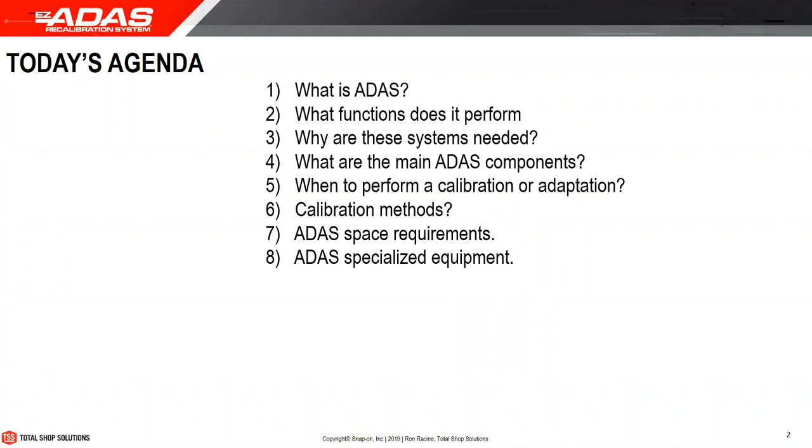So what we're going to cover is: what is ADAS, what function does it perform, why are these systems needed, what are the main ADAS components, when to perform a calibration or adaptation, calibration methods, which vary based on the origin of the vehicle—whether it's a German, European, Asian, or domestic vehicle—ADAS space requirements, ADAS specialized equipment, ADAS procedures, pre and post scan, ADAS centerline reference, ADAS pull drift and road ground compensation on the electromechanical power steering, and then we'll go to a conclusion.

So the industry is changing rapidly. Lately we've seen Ford and Amazon invest about $1.3 billion in a startup company called Rivian. They make an electric pickup truck and an electric SUV that resembles a Ford Bronco. The reason you see this association is Ford has the mass production capability and Rivian does not, but they have the technology on electric vehicles that Ford doesn't necessarily have. If you look at a Ford Fusion, the electric Ford Fusion actually uses a Toyota running gear. So you're going to see more and more of these partnerships occurring, but the industry is changing so rapidly.

In the past, we had time to train the technicians. Now it's like a daily thing—you've got to really stay up to speed.

So the SAE has defined 6 different categories for autonomous driving vehicles, in order to get to the autonomous driving vehicle, which is the ultimate goal for all car manufacturers. Right now, level 0 is no automation—those are vehicles where you have to drive the vehicle, accelerate and brake, total control.

Level 1 is driver assistance, so the driver must do all of the driving, but in some situations you'll get some basic help. This vehicle can provide basic help such as automatic emergency braking, lane support, lane keeping, or lane centering, and things like that. Level 2 is partial automation.

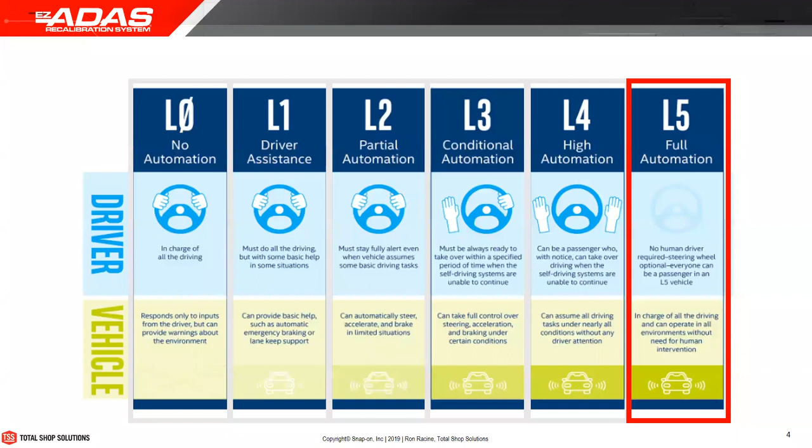So if you set the cruise control for, let's say, 70 miles an hour, and you catch up to a vehicle and he's only doing 60, well, obviously your vehicle is going to slow down to maintain a certain distance and speed of that vehicle ahead of you. If you want to pass the vehicle, all you do is hit the turn signal, and the vehicle will execute the pass, move into the lane, pass the vehicle, come back into the original lane, and reestablish the speed you already preset at 70 miles an hour.

So those vehicles exist. In the heavy duty truck industry, you'll find a lot of autonomous driving vehicles. Actually, you'll find more there than you will in the passenger car at this moment. And also other industries like mining, farming, and shipping or big ships on the ocean. They're all GPS guided and nobody actually really drives them, but you have to monitor the position.

So those systems exist, and if you've ever flown in an airplane, that pilot doesn't drive that airplane. That plane just flies itself from point A to point B. It just knows how to do that with all the computers and all the power behind it. The pilot's there to make sure everything is working correctly. There are no challenges, and if there is a challenge, then you should be able to take over and hopefully land the plane.

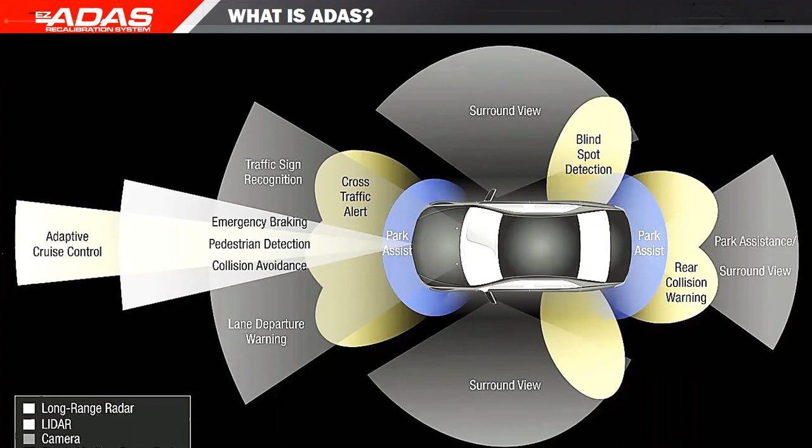Don't have to turn my head - forward and rear collision warning systems. That's to reduce the amount of accidents that could have been avoided, because you're at a traffic light and the car ahead of you, the light turns green, the car stops, and you're not paying attention and you rear end that vehicle. So this will help to prevent that.

Intelligent parking assistance, IPA, allows you to park either parallel or back the vehicle in between two vehicles automatically without using the steering wheel. The car will do it itself.

Cross traffic alert - these are systems that will inform you that there is traffic incoming on the side where you're probably not seeing it, it's out of your peripheral vision, and then it can take action, inform the vehicle, precondition the vehicle, and help you and the vehicle avoid a catastrophic collision.

And lane change assist, which is more for the autonomous driving vehicles, or like the Tesla, where you do get lane change assist. Or you may have lane keeping, which keeps you in the lane centering, which centers the vehicle in the lane, and then lane departure warning, which simply informs you that you're leaving the lane and that you should steer back into that lane.

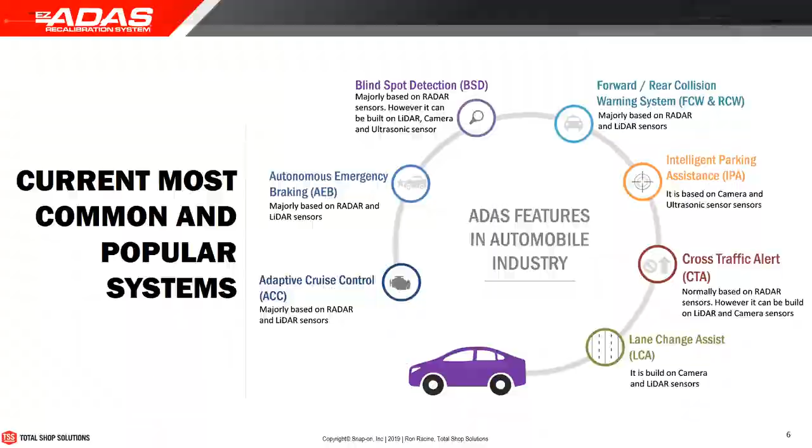By September 2022, 20 automakers have committed to make AEB, automatic emergency braking, a standard feature in their vehicles. So in model year 2022, 99% of the US market will have autonomous braking built into the vehicle, which is significant because that means all those vehicles will have at least one radar, but they can have 2 or 3 radars.

For example, if you're in the Northeast and you're driving and it's snowy outside and you lose control or start sliding, and the front of the vehicle hits a snowbank, you may not damage the vehicle, but the impact may be severe enough to move the radar off the bracket, or move the bracket that's holding the radar, and that will require a calibration. You'll have to go out there and take the snow off. So be careful if you're going to manipulate these radars, especially in cold weather - they have heaters in them, and they get kind of hot after a while.

So it's detecting objects - they'll use a radar to detect the object, they'll use the cameras to define the object, because the radar doesn't know what it's looking at. It just knows the time to impact to the car in front of you is 3 or 4 seconds, so let's take action. Where the camera can actually look and say, oh, that's a car, it's a pedestrian, it's a cyclist, it's a motorcycle. It can define the image, where the radar can only detect the distance and the time to impact.

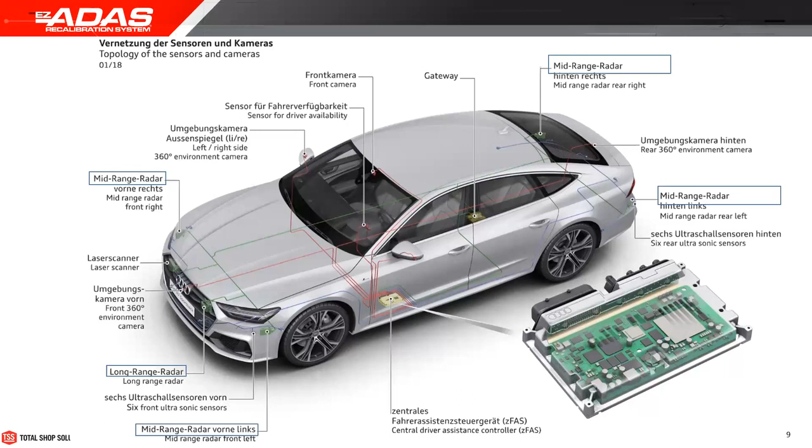So things to consider - I get the question, how big of an envelope do these systems work in? Well normally it's about 492 feet in front of the vehicle, 229 behind the vehicle, and about 147 on each side. So that's the box in which those systems will operate. And what they'll do is detect an oncoming object that might cause an impact, define that object, and inform the vehicle - the precondition itself - to take action, either braking, avoiding, or notifying.

So we talk about, how do we calibrate these? Do they have to be calibrated on the mechanical geometric center line of the vehicle or on the thrust line of the vehicle? Well, there's different philosophies for that, and it's all based on the origin of the vehicle, whether it's a European vehicle, Asian, or domestic. But the thrust line of the vehicle is the dynamic direction of the vehicle as it's rolling down the road.

Some of you may remember this 1974 Plymouth Duster. They used to dog track so much, the only time they were going straight is when they were turning right. So they were manufactured that way. They just dog track a lot.

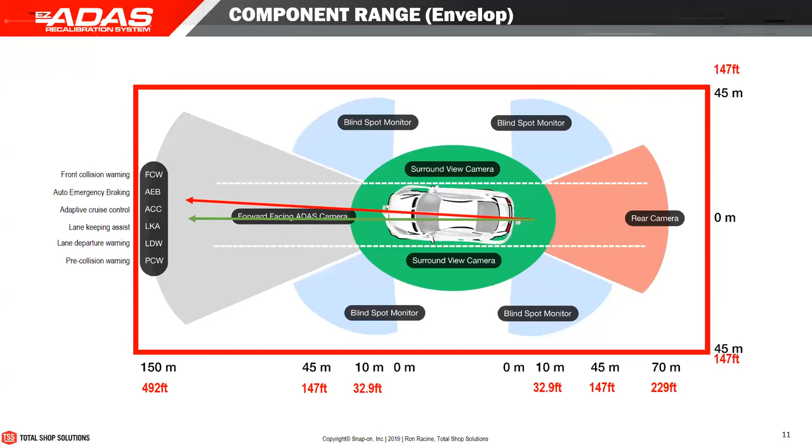So examples of ADAS systems, what they do, and what they do to customers, the people that buy these cars. How do they like those?

So blind spot monitoring is one that's very common now. Rear automatic braking will stop the vehicle when there's an object behind. It could be a car, it could be a child, it could be an animal, it could be anything, your little pet. So they'll use ultrasonic sensors in the bumper. They'll just sound the chimes to alert the driver to something in that blind spot, which is the rear of the vehicle.

The radar will do object detection. It'll see that there's something there within a certain range. Normally the radar has a wider field of view, and it can also go further back. So you can detect objects much faster than you would with the ultrasonic sensor. It gives you more time to react.

The camera will recognize the object. It'll do the same thing, sound the chime. We can apply the brakes if the vehicle is equipped with those rear automatic braking systems. Is it wheel alignment dependent? Not really, because you're not moving at excessive speed.

So rear camera view, or rear view cameras. 67% of the people who buy those cars are very satisfied with the rear view camera. You don't have to turn your head, you can just watch the screen.

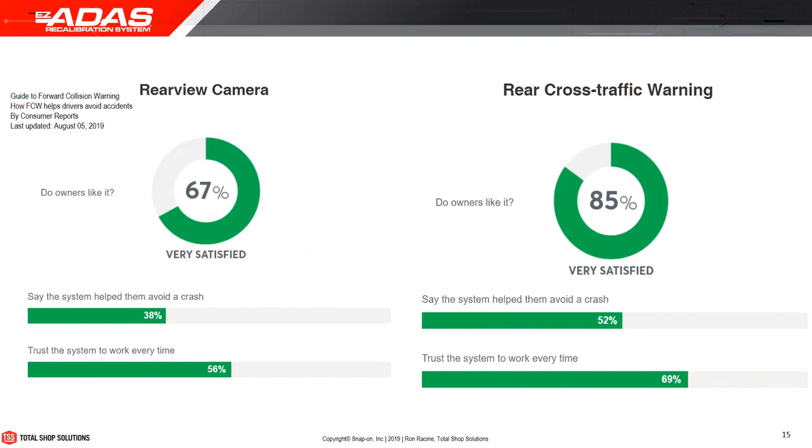Cross traffic warning, 85% of the people who have those systems say they're very satisfied because it helped them avoid a crash or a collision with an object. Forward collision, 69% of the people are very satisfied. Again, it helped them avoid a crash, avoiding that nightmare of having to bring the vehicle to the body shop. Rear cross traffic is 85%.

Automatic emergency braking, 81% of consumers or car owners that have those systems are extremely satisfied. Again, it helps avoid a crash. Lane departure warning, 73%, allows them to correct course properly as they're driving or texting.

Lane keeping assist, 74%. So lane keeping is slightly different. Lane keeping is only found on electromechanical power steering, and some vehicles that have hybrid electrohydraulic power steering, some of the BMWs, where you have an actuator on the spool valve that actually moves the spool valve and allows the fluid to flow in the chambers on your cylinder to steer the front wheels. But with electromechanical power steering, there's a computer on the steering column connected to a motor, and that can actually steer the vehicle and keep it in the lane. So it'll notify you that you're going to be moving into the oncoming lane, but it will steer the vehicle away. 74% of the people really like that.

So what that does is it leaves the consumer satisfied with those systems.

The consumer is looking for those systems in the vehicles. It allows the car manufacturers to correctly forecast how many systems they would like to have in their vehicles, which means that now the system availability increases, the price goes down, and it can make more systems even more available.

So here in Conway at the training center, at the J.D. Michaels Training Center, we have a space which is 48 by 24 by 20. In this space, I can do probably every vehicle: front camera, radar, 360 view, and blind spot. It's a fairly big chunk of space, right?

And right now, when you look at this picture, you can see the doors open, and I've got some light shining on the targets there. The top part of the target has some contrast on it. That's a big no-no. This would not work. So the environment is very important. You have to have ambient light.

So when you close the door, you can see now I've got really nice ambient light, and the targets have no reflections on them. This is the ideal environment to do a calibration right the first time and not have to repeat it. Now, you have to remember, you may have to do the calibration 2 or 3 times on some vehicles. You may not be successful the first time, and that's okay. It's just the way it works.

So here's an example of ambient light versus homogeneous light. If the contrast on the left is too excessive, that would not work well. The one on the right is the ideal one. We painted the ceiling black, we painted all the doors black, so we wouldn't have too much refraction or reflection, and that works really well in this environment.

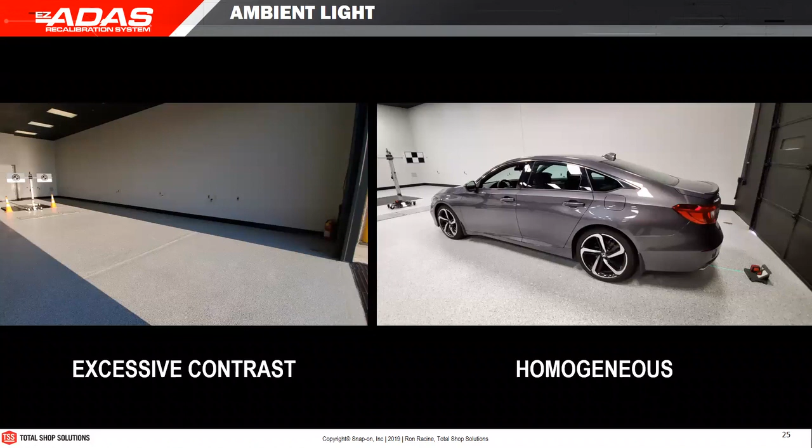This is an example, a 2019 CRV. The CRV is 181 inches long, so 15 feet. Target placement is 6,000 millimeters in front of the center of the front axle, which is close to 20 feet—19.86, so we'll call it 20 feet. You're going to need a little distance behind the vehicle to get in there to set your laser and find that rear center point to establish the center line. So the overall distance you need for this car is 38 feet.

If you have this distance, you can do all vehicles with camera and radars, not BSM blind spot and AVM. That's different.

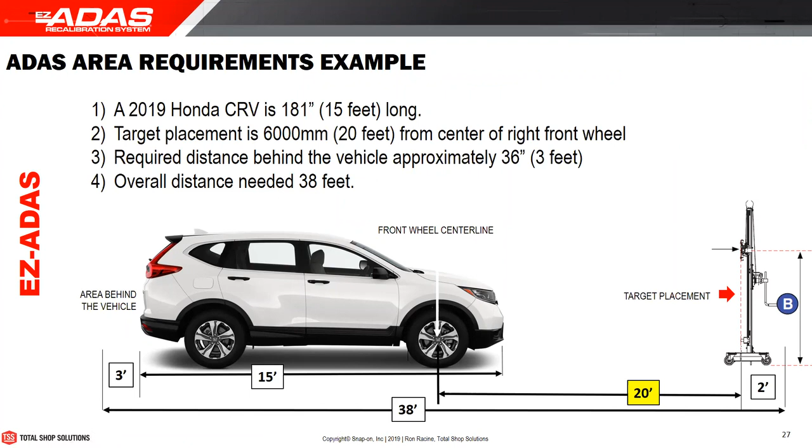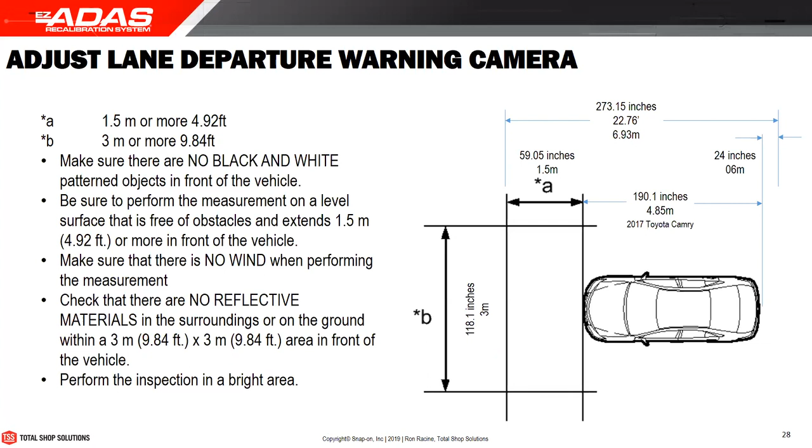Here's an example, this is Toyota. Toyota says you can do it in a smaller bay, 22.76 feet long, which would be the equivalent of a standard alignment bay. However, the vehicle cannot be on an alignment rack that's 10.5 inches above ground. It has to be flush mounted, so the wheels of the vehicle need to reside on the same plane as your fixture. Otherwise your height will be incorrect—rookie mistake, we get a lot of those.

You can buy these mats, they're available for $1,795, and your scan tool may give you the ability to go in there and trigger the calibration. So this is not a drive cycle, it's a static calibration—it has to be done in shop. It needs to be clean, you don't want to get those targets dirty. You've got to roll them up when you're done, and you don't want to roll all the dirt with the targets either. So it requires a specialized area to do this correctly.

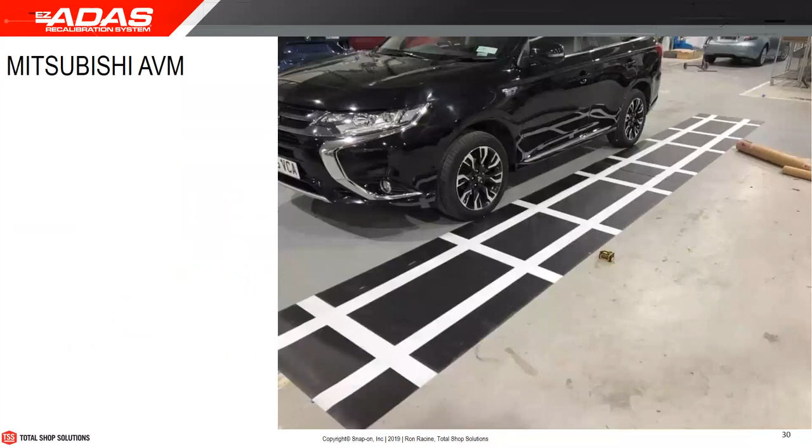Mitsubishi AVM uses a similar target to Ford. Just go up against the wheel—there are markings on the target to allow you to line it up with the center of the wheel. Then you use your scan tool, invoke the calibration procedure, and it looks at these lines and calibrates itself. Remember, the targets don't calibrate the vehicle, the scan tool doesn't calibrate the vehicle—the car calibrates itself.

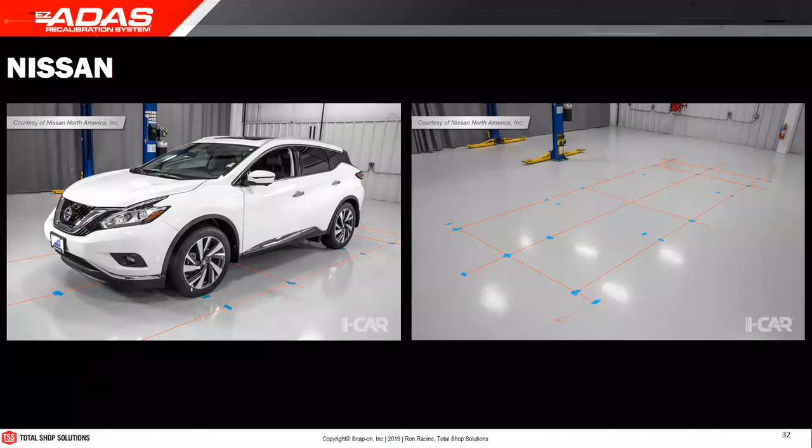Nissan wants you to park the vehicle inside the building on a nice clean floor. Then you do all this geometry and lay lines down—you need a string and a plumb bob to find the front center point, then find the rear center point, and pull a line down the middle of the vehicle. Then you do some geometry and mark the floor where you need to put the calibration fixtures or targets. This takes about an hour to do.

You've got to have a nice clean floor—can't be wet, tape won't stick. It's kind of ironic, isn't it? Advanced driver assist systems, where we're going to use a string and a plumb bob, more strings and tape, to calibrate those systems. Just saying.

Some vehicles like Fords have the blind spot monitoring built into the rear tail lights. So when you remove a tail light, you're going to have to reset that. You're going to need those long targets on the floor.

I get this question a lot: what about the levelness and flatness of the floor? If you're in a standard constructed building built by a contractor, they have numbers for floor levelness and floor flatness, and normally the floor will be flat and level enough for you to accomplish that calibration. If it's a Volkswagen, Audi, Lamborghini, Porsche, any of the VAG products, it has to be done on an alignment rack because that is a level surface.

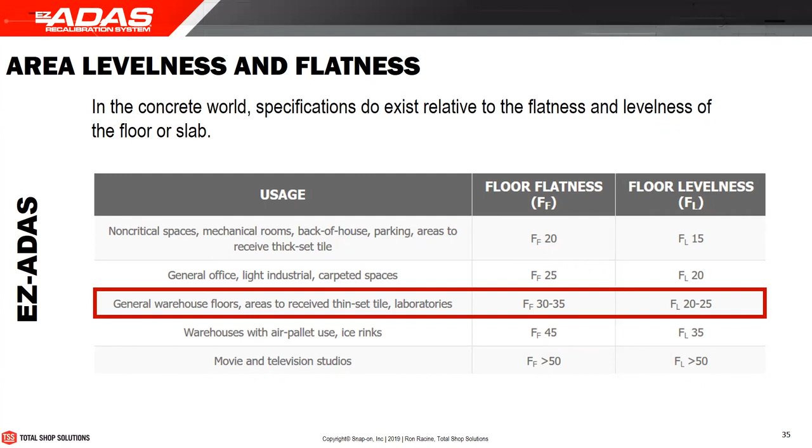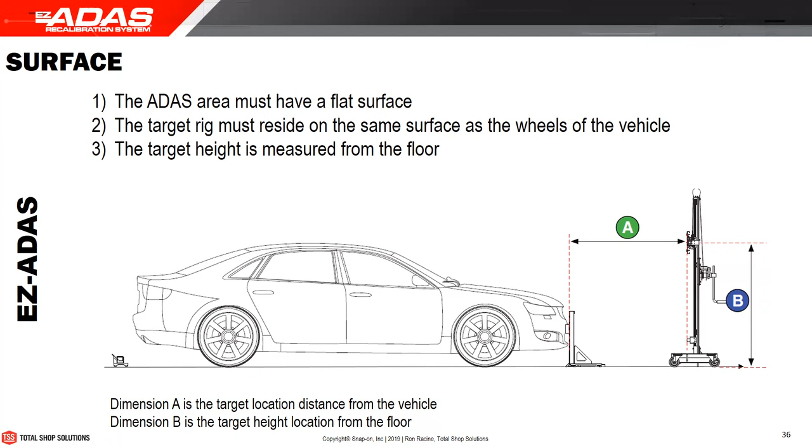Here are a couple of examples of conditions that will impede your calibration. This is the ideal situation, where the wheels of the vehicle are resting on the same plane as the fixture. When we set the fixture height for the target, there's a ruler on the back of the fixture, and you loosen a thumb screw and lower the fixture until the ruler touches the ground.

So you're actually measuring from where the wheels are touching the ground for the camera height. If you have a situation where you're on two different slabs and one slab is leaning downward, then when you level the fixture, you're going to have calibration challenges and the target height won't be correct. Or this type of situation where the slab actually points upward - that's the problem too.

That's the problem, and this is the one we see the most: a guy buys a calibration system and he's trying to calibrate a vehicle, but his bay isn't long enough. So he parks the vehicle on the approach to the shop and sets the fixture inside the shop. Now we're on two different planes, there's an angle, and it's not working really well for him.

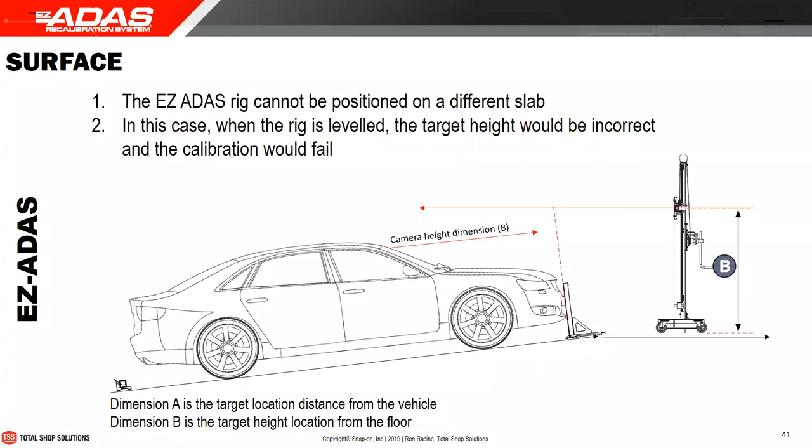Space is very important for ADAS. Those of you who have done Mercedes Distronic systems back in the 1990s - we needed like 48 feet in front of the vehicle, and you would have to do it several times before you got it right. It had to be a really flat surface. That was back in the 90s. So the longest distance between the vehicle and target board today is 6,000 millimeters - those would be the Hondas and Acuras.

Why do we need these systems? This is why. The National Safety Council reports that cell phone usage while driving leads to 1.6 million crashes each year. Nearly 390,000 injuries occur each year from accidents caused by texting while driving. One out of every 4 car accidents in the United States is caused by texting and driving.

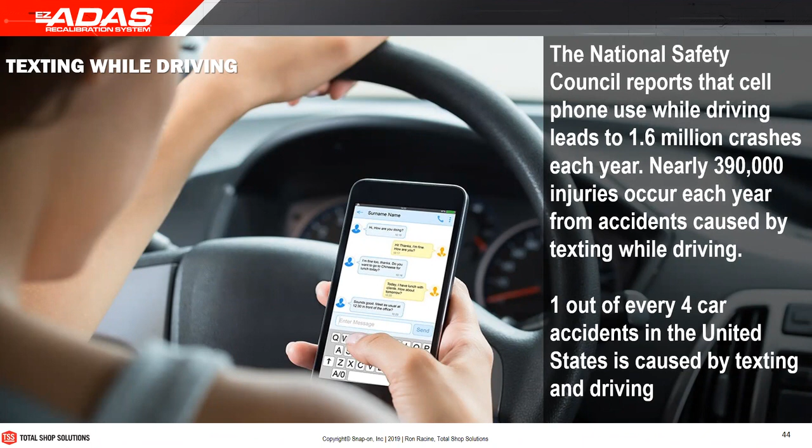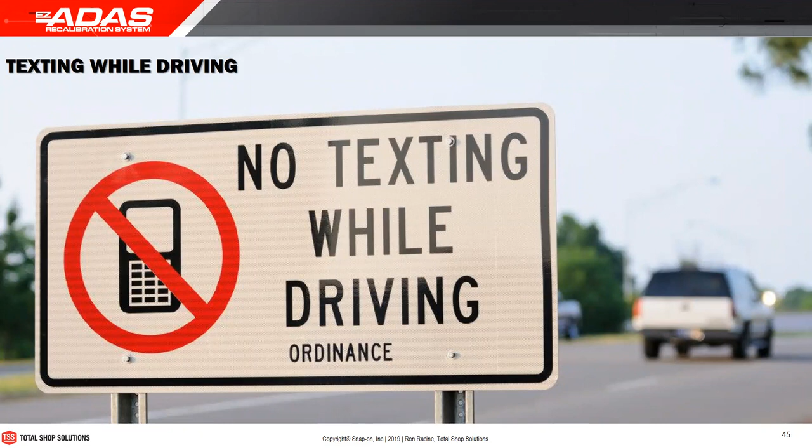This is why customers are looking for lane keeping systems, automatic front braking, and autonomous cruise control, where the vehicle can do most of the driving while they're doing other things. In some states and cities, they have ordinances against texting while driving, but the problem is if you're driving and texting, you may not see the sign - so you may get caught. Other countries like Australia have cameras that take pictures.

One brain is controlling the accelerator and brake, and the other brain is controlling the direction of the vehicle. So in case of an emergency, they may not be able to connect the two brains together and do the right things to avoid a collision or running off the road. That's why when they ask me if I trust these systems more than I trust the driver, I answer yes, this is one of the reasons.

What are the main components? We'll go over this briefly. So we have cameras in the front. They can be monoscopic cameras, which are single lens that pan digitally. Then you have stereoscopic cameras, like in the Subaru WRX, with two cameras. Some of the BMWs now have two cameras. Normally they're mounted on the roof line in the front behind the windshield. They could be at the rear also.

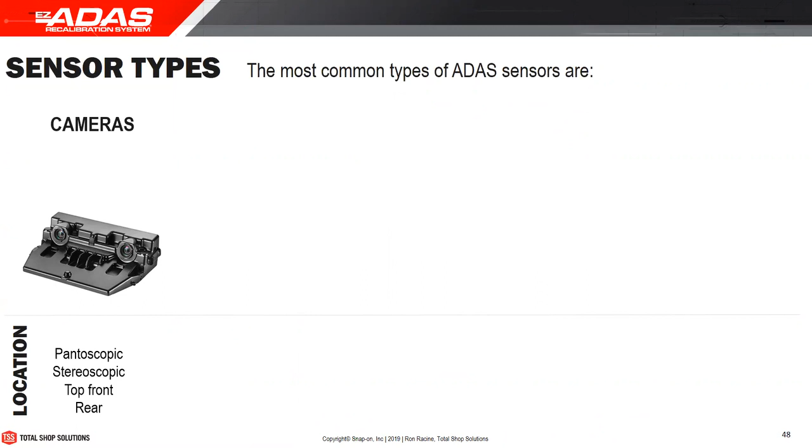Here's the deal. If you have adaptive cruise control, on most cars it will only operate from 30 miles an hour to 90 miles an hour. That's the operating range. So when you get down to 30 miles an hour, the ACC gives control back to the driver. With automatic emergency braking, the ACC will give control back to that other radar, which is a short range radar, and it will apply the brakes and stop the vehicle. It pre-charges the system, applies the brakes, and stops the vehicle on behalf of the driver because the driver is busy doing other things.

We're not paying attention. Or maybe he's ill and can't drive. That can also be a cause.

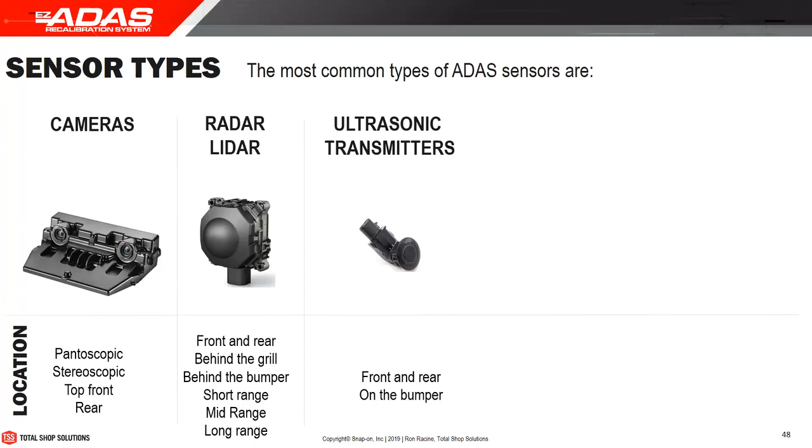Ultrasonic transmitters, those little round pucks you'll find in the front and rear bumpers, are probably going away in the newer cars. They're dropping those in favor of radars.

Steering angle sensors have been around since 1992. The Ford Crown Vic with air suspension had steering angle sensors to inform the computer the driver is turning right, so it would jack the pressure on the left side and lower the air pressure in the air bellows on the right side. It was to trim the attitude of the vehicle when you accelerated and turned. It really didn't do anything to intervene on behalf of the driver, but it did change the attitude of the vehicle. Made great cop cars.

Wheel speed sensors have been around since probably 1971, if I recall correctly, on the Chrysler Imperial with ABS system, and now they're on every vehicle. You cannot find a vehicle that doesn't have speed sensors. They have them in the front and back, some have 4, some have 3, depending on whether it's an independent four-wheel vehicle or a solid rear axle. The majority will have 4 with electronic stability control because you've got to control all 4 wheels, and these will report the wheel speed to the onboard computer.

That onboard computer will share that wheel speed information with various host controllers on the car that control things like automatic emergency braking. So if you go to a bigger wheel and a bigger tire, your road speed will be different, and the time-to-impact calculation by that radar will be based on road speed and the vehicle in front of you. So it's not a good idea to change the overall diameter of a tire on a vehicle with autonomous emergency braking. Modifications are going to kind of go away in the future because those vehicles are now homologated, meaning the manufacturer made the vehicle this way with these sensors, tire sizes, tire pressure, and wheel sizes, and it'll be tough to change those components.

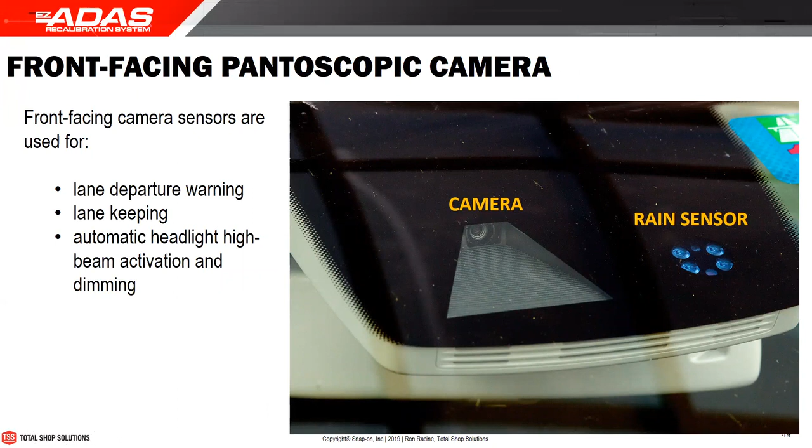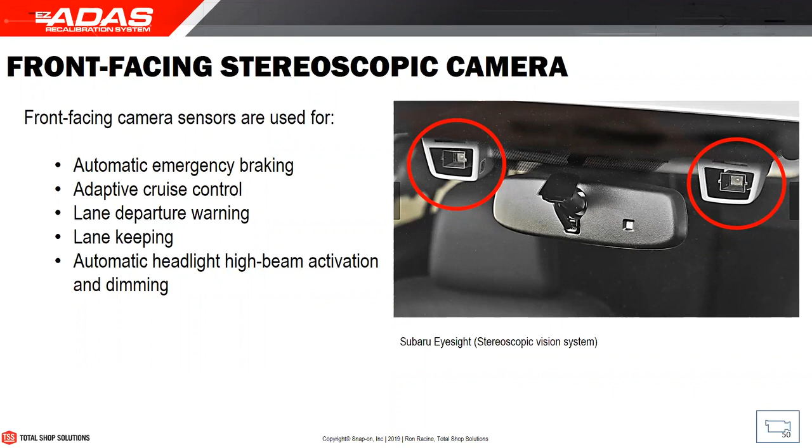Front-facing cameras on the Subaru handle automatic emergency braking, cruise control, lane departure warning, lane keeping, and pedestrian recognition. Even traffic sign recognition is done by the cameras. But the cameras can also detect objects and define the object distance.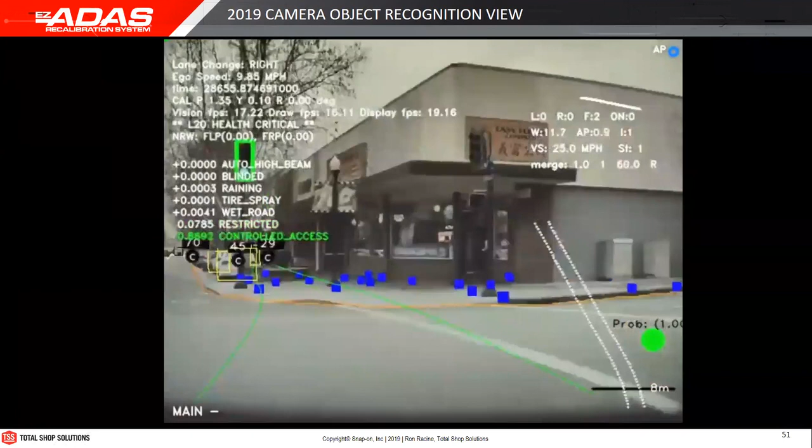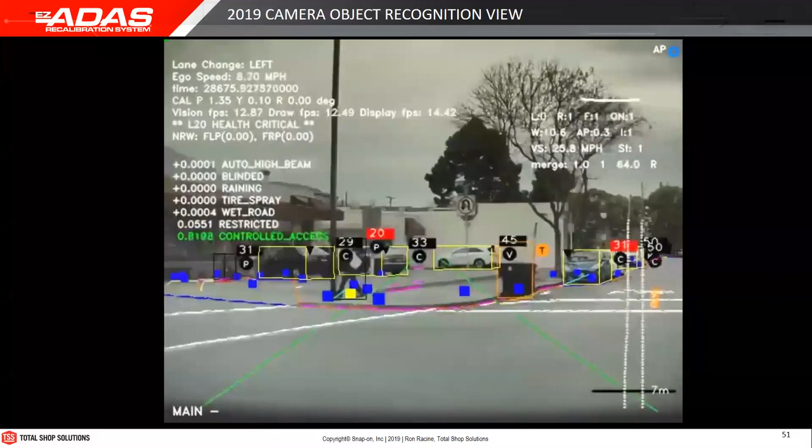That's the IPMA, the main host controller, and that information is shared with other controllers to make decisions on behalf of the driver, to intervene, to minimize or mitigate a collision, or even avoid one in some cases. Cameras have come a long way since 2005 — they're faster, more reliable, recognize more objects, and are just better overall.

Rear side-facing radars have a range of up to 50 meters, or 164 feet, and can detect vehicles crossing to the left or right behind the driver, as well as other objects like cyclists, motorcyclists, or snowmobiles up in the Northeast — whatever's on the road.

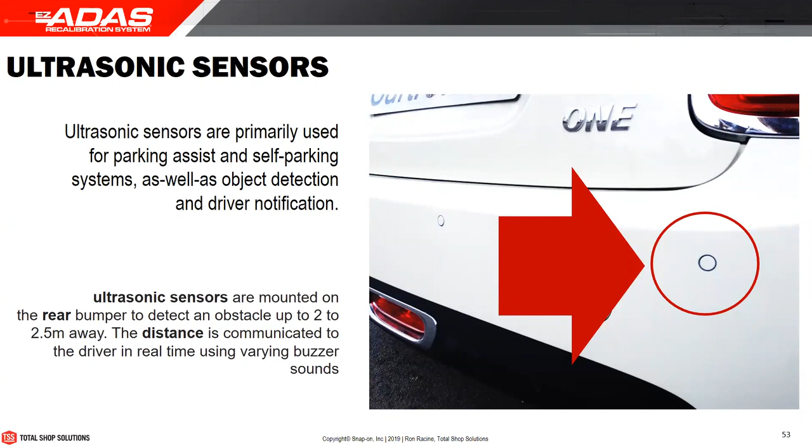Ultrasonic sensors, those little pucks, are going away. They have a short range, about 2 to 2.5 meters, and they're not very reliable — if there's dirt on them, they may not work. For those with pickup trucks that have them in the bumpers, if you don't have a factory-installed trailer package, when you hook up your trailer, they'll see it and start to buzz.

Steering angle sensors have been around since 1992. Some have to be reset, some don't — the majority right now are all adaptive, so as soon as you start the car and start driving, adaptation happens on that drive.

For example, if you're in Arizona, in the valley where it's 80 degrees, and you drive up to Flagstaff and get snowed on, the road conditions change. The activity on the steering wheel changes — you'll be steering more left and right, more input — so the computer resets itself and says, this is a plausible range.

There's no zero reset — that simply does not exist. It's a plausible range. The system says, for now, in this range, don't trigger anything. Anything above that, we'll start making decisions on whether to slow the vehicle down, apply the brakes, or whatever needs to be done.

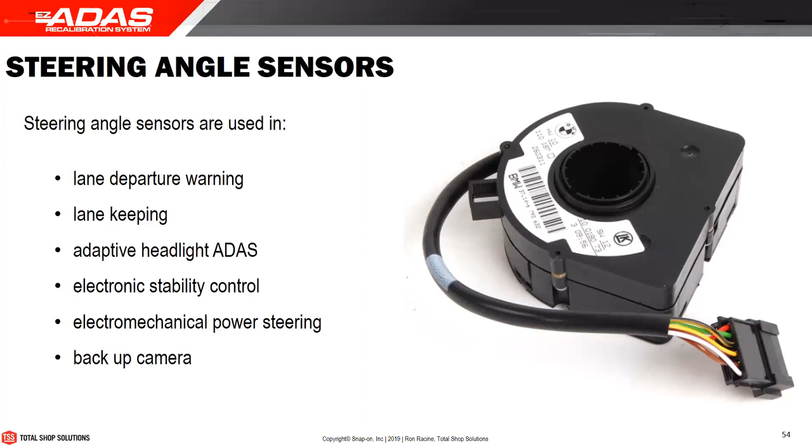A few historical dates to refresh our memory: in 1992, Mitsubishi was the first to offer a LiDAR-based detection system. Toyota offered laser adaptive cruise in '97, and in '99, Mercedes introduced the Distronic system.

Jaguar went radar-based, Nissan laser — you see the trend here. The Asians were going more towards laser and radar, LiDAR, while the Germans leaned more towards radar. BMW introduced radar active cruise control in the year 2000, so that's 20 years old.

Everybody's going hog wild on this ADAS stuff, but it's been around for quite some time. The Lexus division first brought laser ACC to the US market.

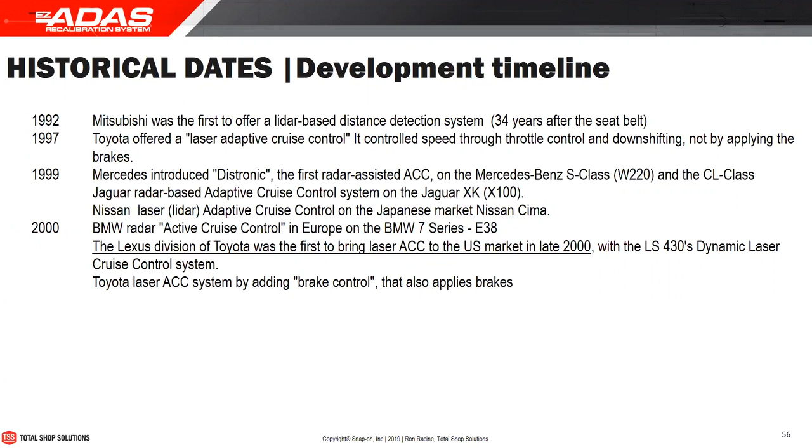Toyota added brake control to their ACC. Then in 2001, Infiniti introduced the laser Intelligent Cruise Control system, Renault brought adaptive cruise control, and Lancia went with radar — the Italians were going more towards radar also.

Volkswagen — that big target you see in most ADAS advertising that looks like a large domino, that's a Volkswagen or VAS target. It was first printed in 2003, so that's 17 years ago.

So when you're talking to a Volkswagen technician, he knows all about this — he's lived it, he knows about the targets, the calibration, how to prepare and precondition the vehicle. Those people have been working with these systems for quite some time.

2003 is when we had the first North American or domestic vehicle with adaptive cruise control, the Cadillac XLR, which was a Bosch system sold under TRW — so it was a partnership.

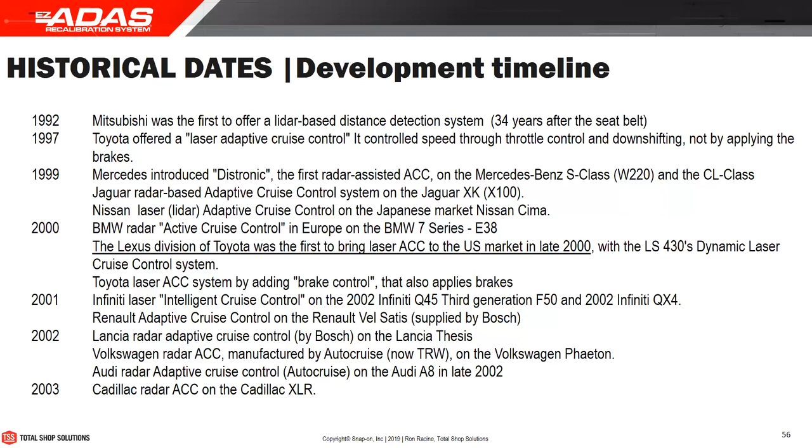These are the most significant ADAS systems. Right now this is level 1 integration, driver assist, but we're going to take it to step number 2 here in a few years. We're going to have V2V, vehicle-to-vehicle communication with cellular phones and things like that in the car.

So let's say you're driving ahead of me, traveling at 60 miles an hour, and there's a catastrophic event in front of you and you have to apply the brakes really, really hard. When you apply the brakes, or the system applies itself automatically with AEB, when that vehicle hits the brakes, it'll inform the vehicle behind you that you're braking and that vehicle will start to brake. So in this case, you don't have to wait for a driver reaction. You get a communication from the vehicle ahead and your vehicle will start to slow down as well.

So these are things they're going to do with V2V. It's better control, accident and collision mitigation, collision avoidance, and driver assistance. Also, in the case the driver is incapable of driving the vehicle for whatever reason.

These systems are predictive systems. They actually measure distances. They know there's a vehicle ahead of you, they know the speed, and also the closing rate. The closing rate is what these computers think of as time to impact. Normally there are 4 phases.

In the first phase, the computer will say, hey, I think you're closing in too quickly, I'm going to warn you, so it'll sound a chime and put a little display on your driver information center. The second phase, it might shake the steering wheel and put another piece of information notifying you that you should slow down or you're going to hit that object in front of you.

So when should we calibrate, or adapt, or perform an adaptation? I call it adaptation when it's a dynamic system, where you're going to drive the vehicle - that's more of an adaptation than a calibration. So after collision repair, bumper repair, wheel alignment, customer complaint, system failure, windshield replacement, suspension repair, sensor replacement, or if you change the tire sizes - they all need to be recalibrated.

That's your lasers, your cameras, and your radars. So for example, if you're at Volkswagen or Audi and you get an S7 in with 3 radars and a camera, you're going to be calibrating all 4 of them. And trust me, they charge for all 4 of them, plus the alignment.

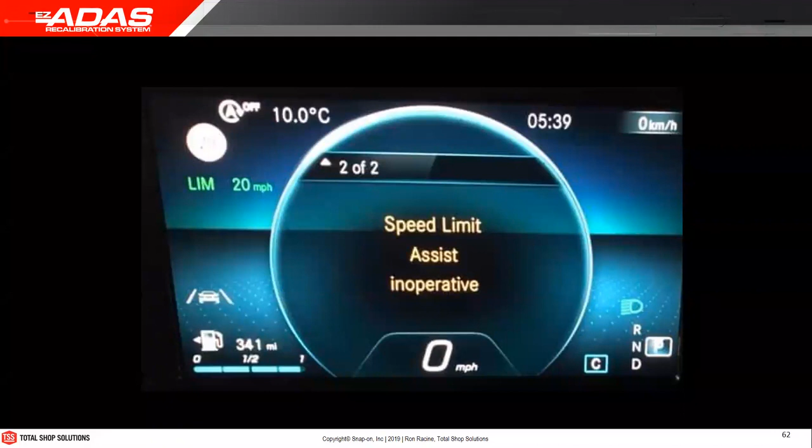Or when you have a problem like this and you get a message in the information system that says speed limit assist inoperative - well, it all depends where you're at. If you're driving in a snowstorm and the radar or laser gets all plugged up, that message will pop up. Or there might be a problem with that system, there might be a malfunction. So when you get these messages, the vehicle has to go to the repair facility.

You do a pre-scan, pull the code, determine the source, the root cause of that - why is this code in there? And then you follow the repair procedure, then the calibration procedure to overcome that obstacle.

Side-facing radars, again, they get damaged a lot. Minor collisions that may not show any damage, or just a little scratch on the bumper for example, that would require calibration. Or the unit hasn't been connected - this came back from a body shop and it had not been connected. We understand in a body shop you have several people working on the vehicle and somebody just forgot to connect it, and then you get the malfunction error message.

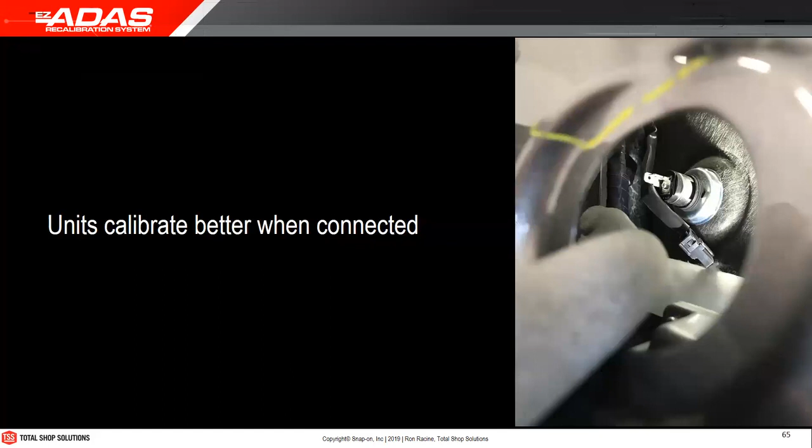Or this one here, where the customer complaint was that the blind spot or cross traffic alert would only pop up when the car was almost next to the vehicle. Well, the radar was installed incorrectly.

Unfortunately, this one is like an equilateral triangle for the bolt pattern, so it can be put in any position. The position on the left is incorrect, the position on the right is the correct position. There's no label on that radar that says this side up, however, there is a similar radar on the opposite side.

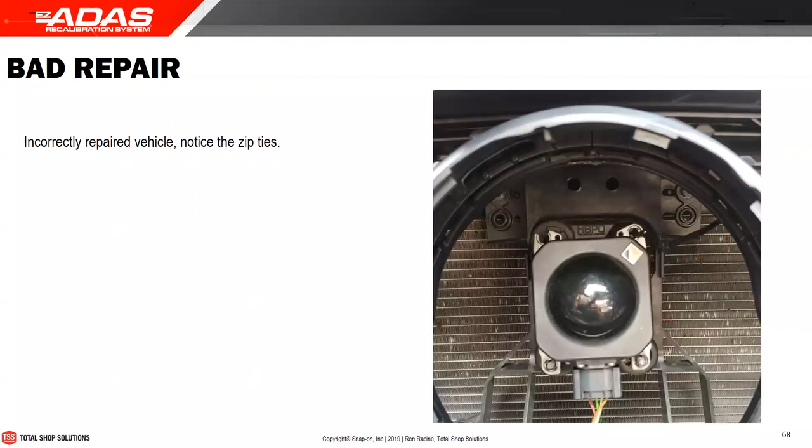Incorrectly repaired vehicle. If you look at this radar, it's a Volkswagen, so that's a Bosch LRR4 radar. You can see the upper left ear on the mount is broken off, and it's been attached using a zip tie. Classic repair. So we have an individual attempting to calibrate this, getting a calibration failure, and blaming the calibration equipment for not being able to calibrate. We had to go back in, pull the emblem, have a look, and we saw that it was broken. It hadn't been repaired correctly, and that was the problem. So we put a new radar, recalibrated, and everything's fine.

Here's another example, a radar on a Honda Accord. There's a panel in front of that radar, and you take the panel off, and the radar is behind it. That one had been put on there with double-sided tape, and it wasn't really high-quality tape, because it fell, and the radar was laying down and couldn't calibrate. So you always have to look at the work to make sure it's been done right and things are in the correct position. I know from the collision industry, the mounts for the radars have specific control points that can be precisely measured with the equipment you have, and that has to be done. Make sure the radar is in the right location and not mounted with double-sided tape.

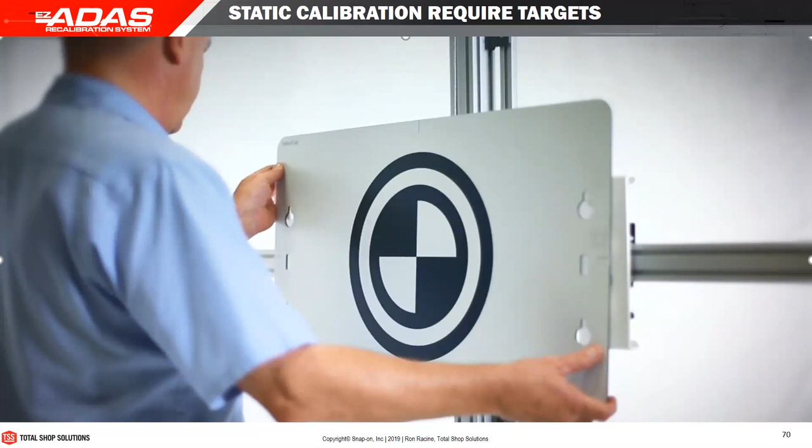Accuracy is very, very important when you're doing these types of calibration. My question has always been, what is the camera doing when it's calibrated? I know what the radar is doing, but what is the camera doing? Why can I not calibrate a camera outside when I'm driving the vehicle, the camera's in service working out in the big sunlight, but I can't calibrate it outside in the sunlight? The reason is simple: on a camera, when you place it in calibration mode, all the filters go away, so it's looking for a very specific pattern in a very specific location - distance from the vehicle, height from the vehicle, and also side-to-side position. It's looking for that pattern.

So it's important to have target boards that are rigid, that don't flex, don't bow, or don't cave in, because that changes the shape of that target. It goes from being flat and non-distorted to a pin cushion or a barrel shape, and the cameras may not recognize it, or may fail the calibration because it doesn't recognize the target as being the correct target.

This is what it would look like. In the middle, that's no distortion - that would be the ideal target from the camera's perspective. On the left side, you have a pin cushion shape, which could come from a target made out of foam board or cardboard material that can distort. Our targets have been tested in environmental chambers all the way down to -40 degrees up to 110 degrees for flex, to ensure they do not change in a regular work environment. On the right, you can see a barrel shape. Obviously, when the camera sees this, it's totally distorted and can't calibrate, and you get a calibration failure message.

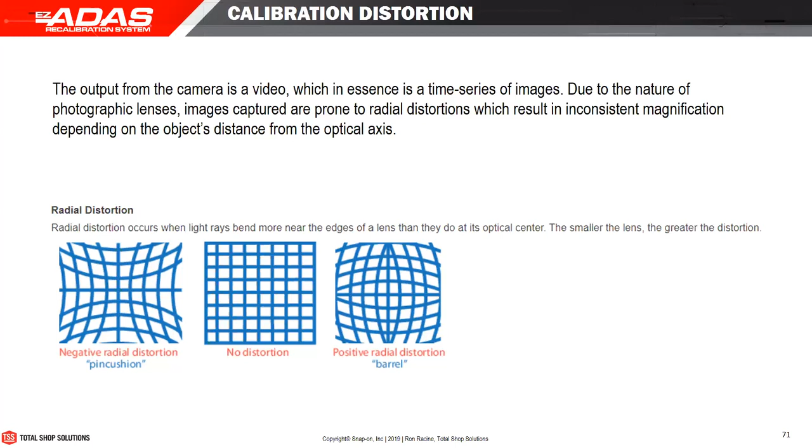There are two distinct calibration and adaptation methods. So we have to look at the car manufacturer, and there are three different philosophies. The German vehicles, the majority are static.

They require an alignment rack for a level surface, and a wheel alignment before you do that. They require target boards for lane departure warning and ACC, and a scan tool. In addition, the fixture that holds the target board has an additional camera mounted on it, so you can position a target board on the thrust line of the vehicle, because German manufacturers like Volkswagen do not trust the technician to find the mechanical geometric center line of the vehicle.

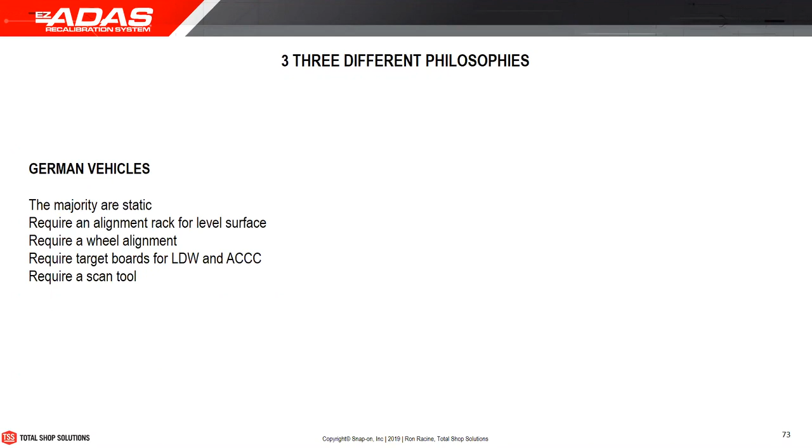But they can trust the aligner to find the thrust line and position that board on that thrust line. Normally, after your alignment, your thrust line should coincide with your geometric center line, and that's where they want the board to be mounted.

Very different, the Asian vehicles - some are static, some are dynamic, some are both. For Hondas, for example, the scan tool will say static and dynamic. If you click on dynamic, it'll make you do a static first, then have you go out for a drive to complete the dynamic.

So they'll recommend or suggest a wheel alignment. For example, Honda and Hyundai will say, look at the vehicle, and if you think it needs a wheel alignment, you should do that before you do the calibration. Good standard practice, best practice, always align the vehicle before you do a calibration, so all four wheels will be pointing in the same direction as the camera.

In addition, always do a pre-scan, and if there are codes in the computers, fix those first before you continue. If you have a wheel speed sensor issue, you may not be able to achieve a calibration on certain systems that require that information.

The Asian vehicles, for the most part, do not require an alignment rack. They do require targets, and they do require a scan tool to invoke the calibration procedure.

Domestic vehicles, the majority are dynamic for ACC and lane departure warning. Blind spots and 360 or around view monitoring are all static, like that Ford where you need those big targets, the big mats. And then they'll require a drive cycle, and the drive cycles will take anything between 5 minutes to 1 hour. It all depends if you're in a target-rich environment.

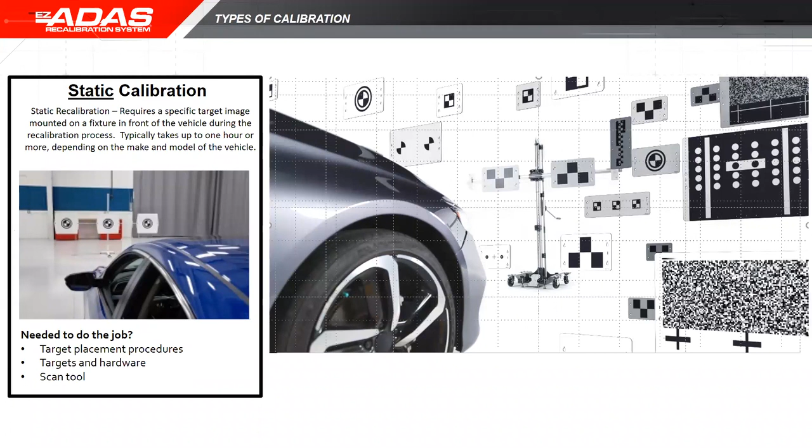So static calibration will require targets. There's a bunch of different targets because there's no protocol right now in the industry on what type of targets you should be using. They'll require tools and hardware and a scan tool.

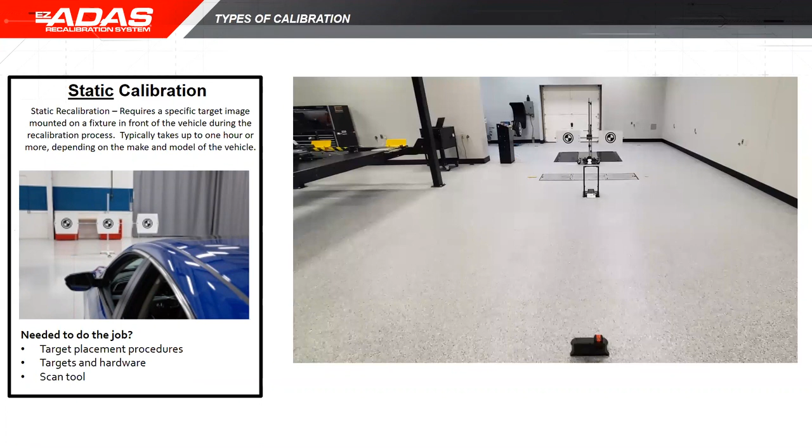And you'll need space, a lot of space. So a standard shop bay normally isn't long enough to do all of the vehicles. You'll be able to do some vehicles, but not all of them. You can do all of the dynamics, but for static, you're going to need more space.

You're going to need a scan tool, whether it's this one or any other scan tool. You need a scan tool capable of connecting to the vehicle and talking with those host controllers inside that vehicle, so you get feedback from the vehicle, and you can also invoke calibration procedures and complete the task.

We'll pass that one - dynamic calibration is slightly different. For dynamic calibration, you'll have to invoke calibration, so you'll need a scan tool to tell the computer to go into calibration mode. Then you're going to go on a drive cycle and do your observations. Whenever the computer determines the position of the vehicle based on your observations and deems it calibrated, it'll give you a confirmation.

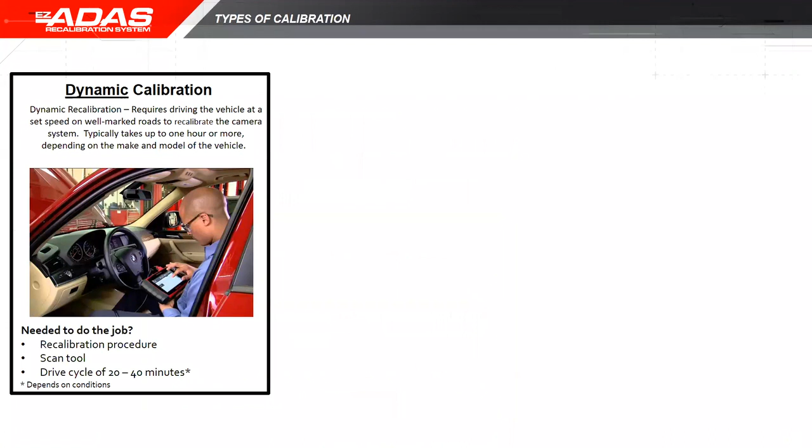For this you also need a labor guide, because they are different. For example, on the Ford, they'll allow up to 0.7 hours to reprogram an IPMA camera, and then 1.7 hours to calibrate it, because you're going to have to drive that vehicle, and you may not be successful the first time.

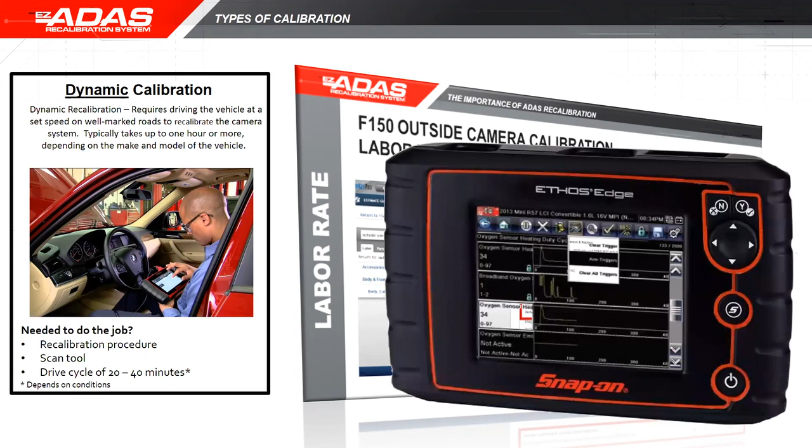And you're going to need a scan tool. A scan tool is a great tool because it gives you feedback. When the computer's done, it'll tell you it's done, and you'll see it in the scan tool.

Initialization - you may have to program a vehicle, so you may need a pass-through device, a J2534 pass-through, to be able to reprogram that new component you put in there. With some manufacturers, the program is in the component itself. You just have to connect to the component, and then initialize it so that the main host controller can look at that and confirm that's a camera that works with this vehicle.

If this is coming from a junkyard and the serial number matches, it's a matched serial number - let's go ahead, calibrate it, go out for a drive, whatever, and you're good to go.

So these take a little more time, so you need a labor guide. You can't do a flat rate on these. Trust me, you're going to go out of business if you're doing a flat rate.

So quick recap: static calibration requires space, specialized equipment, and a drive cycle to confirm in some cases. Toyotas are the prime example.

Dynamic calibration requires a drive cycle, a scan tool, and in some cases specialized tools. For example, on the Ford Taurus, if you're going to do a front radar, you're going to need specialized tools in the form of a protractor and a level. You're going to need a qualified technician - this guy needs to be trained because there's a big liability factor involved with doing these procedures. This is not like putting air in a tire, which could contain a certain liability factor too. You need a dedicated area for this and a labor guide.

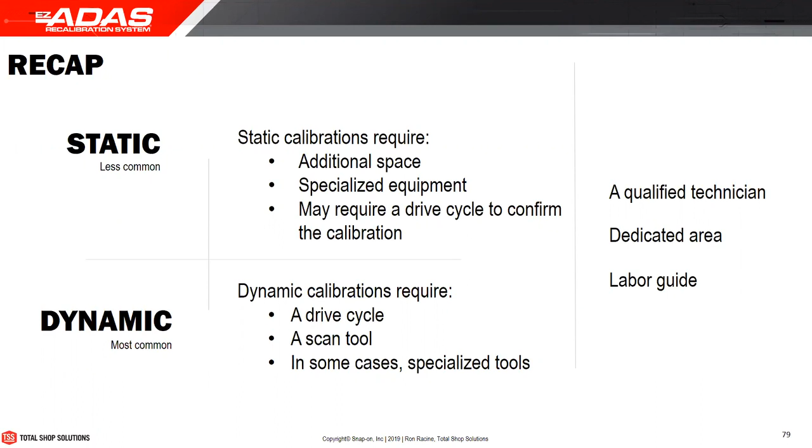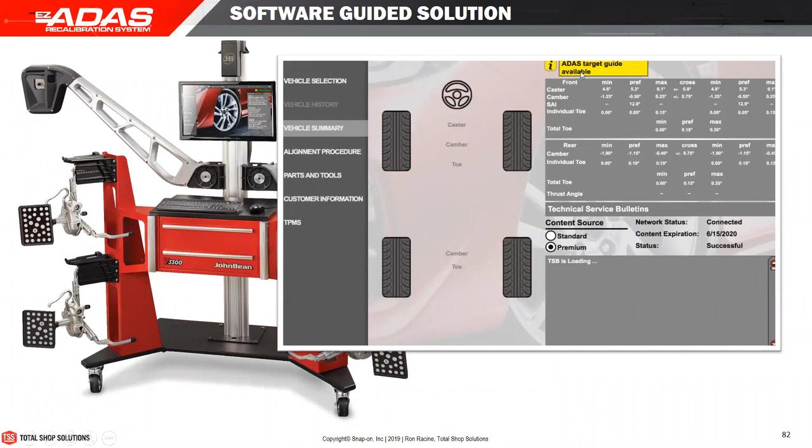Wheel aligners now - the John Bean and also the Hofmann brand of wheel aligners are indexed, so the databases are indexed for ADAS. So if there are targets available for that vehicle, you'll get a notification that will pop up after you do your vehicle selection. You click on the little 'i,' the information button, and that will take you to the book.

So you can set that up, put your target in place, connect your scan tool - obviously it's already going to be connected because you did a pre-scan. You go to the scan tool, hit the button, and invoke the calibration.

On this Toyota, for example, this is a 3 position setup. You'll start in the middle, and when it gets the target in the middle, the system will inform you to move to the left. It'll give you the position for the left, then move to the right. You move the target to the right, hit the scan tool, and calibrate all 3 positions, and you're done. This setup with the EZ ADAS system takes about 10 minutes.

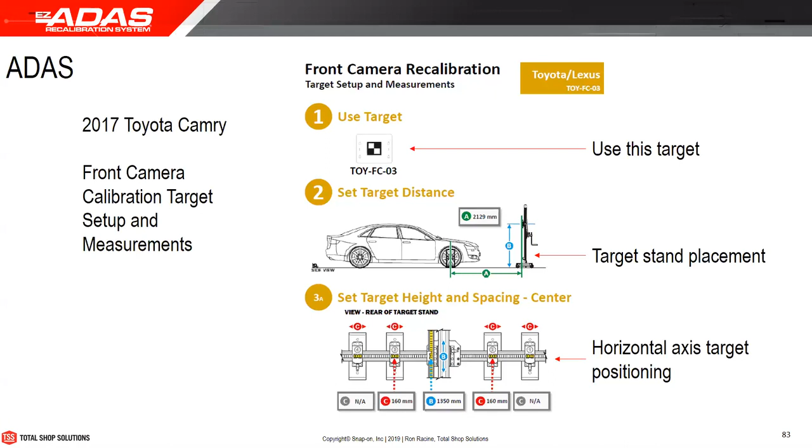The factory setup with the plumb bobs and strings, probably about an hour for somebody that's really good at it. Hour and a half if you're just starting. The geometry is very involved.

If it's a radar, we'll tell you which radar target to use because there's 3 different reflectors. There's a 1, 2, and 3. There are different sizes for different radars. We'll also give you the dimensions where to set the radar from the front bumper.

There's also an app available for Snap-on products, the EZ ADAS app, and this app contains all the information. When you select a vehicle, it'll show you which target to use. It'll give you information on where the target needs to be positioned. So if it's 4,000 millimeters, that's 12 feet in front of the vehicle, right? You'll know if you've got enough room to do it.

Then you have information like unload the vehicle, how to precondition the vehicle for the calibration. Remember, if the vehicle is loaded, the ride height will be different. The target will still be positioned for an unloaded vehicle. So you have to unload the vehicle.

If it's a BMW, you may have to load the vehicle. If the manufacturer's procedure says you should have a full tank of gas, you should make sure you have a full tank of gas. And here's why: some of the manufacturers are actually reading the fuel sender information before when you're calibrating. And if it's not full, because you can put weight in the rear, right?

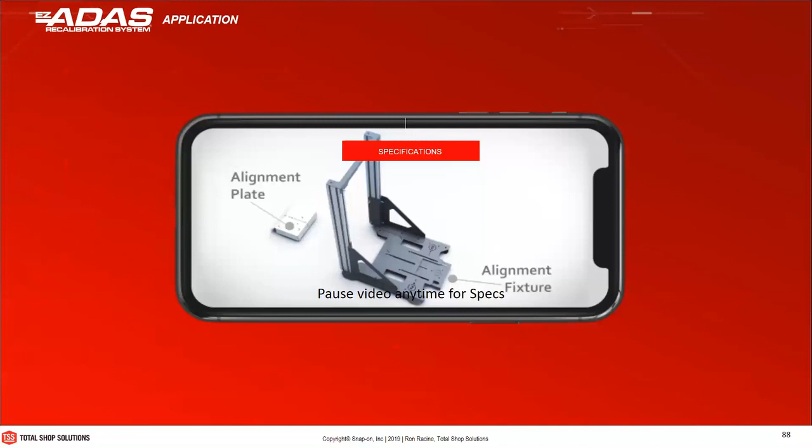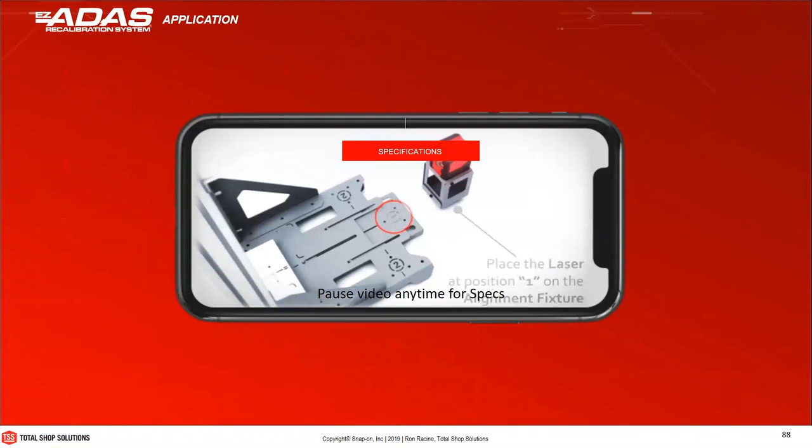How to find the front center point, the rear center point, establish the mechanical geometric centerline of the vehicle, where to position the stands, the height. So there's different procedures for different makes, models, and years, and they're all included in this beautiful little app, EZ ADAS app.

Oh, I just went too quickly here. So another piece of information: some manufacturers require additional information to be entered in the scan tool. As you're going through the process and set everything up, they may require you to input the distance from the ground to the target. And those numbers are included in this app. So you don't have to go to your information system.

You download the app on your Android or your iPhone. You have the information. You just enter that information in the scan tool. It makes calculations for you to determine the proper height, the CH value or DH value of that vehicle, so you don't have to do it. And then when that's done, you're ready to calibrate.

These are rookie mistakes that have been made in the field right now by people who are doing mobile calibrations where they missed this part.

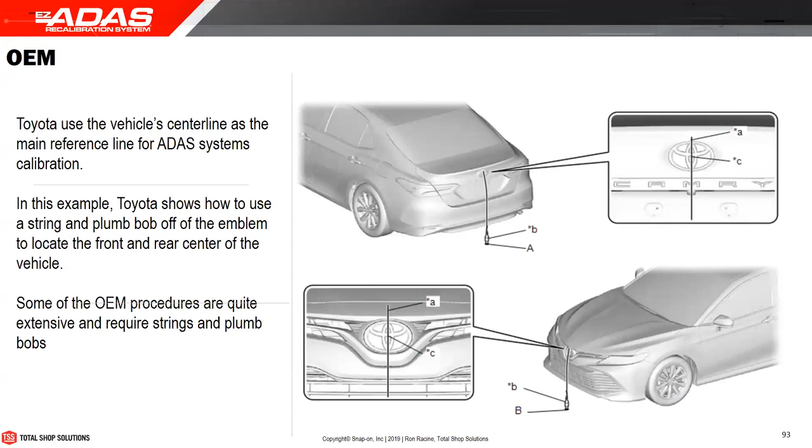So quickly, because I'm running over here. This is an example of an OEM procedure using a plumb bob and a string, and you can see all the geometry there, right? That's why I say it takes about an hour and a half to do all of this, because you have to read, you have to measure, you have to position, and you have to mark the floor for these targets for every vehicle. It was very lengthy.

The EZ ADAS will cut about an hour of your time on this setup.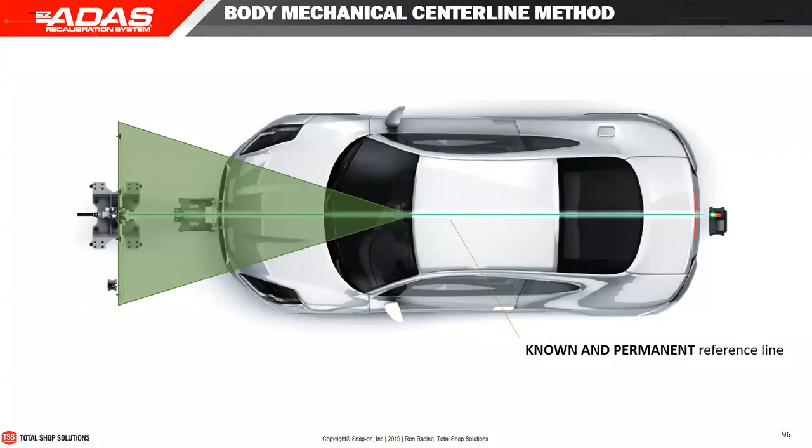It's critical that we set the target based on the mechanical geometric center line of that vehicle when required by the manufacturer, or on the thrust line of the vehicle when required by the manufacturer, mostly German manufacturers. Follow the OEM procedures and you will be successful.

This system, for example, is a rear wheel reference only. Some may think it's a thrust line, but you're not compensating the rear targets, so you do not know where the thrust line is. So the orientation of that laser could be incorrect based on the run out of that wheel. If the wheel is not perfectly perpendicular to the spin axis, then the laser will reflect that and it'll change the center of your center line.

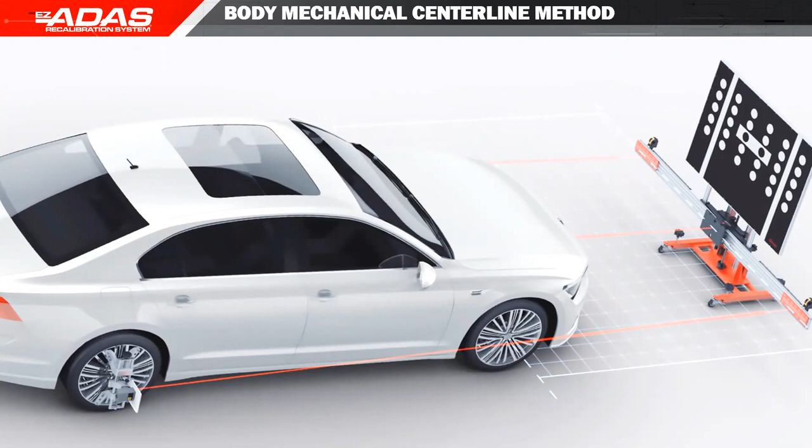And it would look like this. So best practices: always follow OEM procedures, step by step.

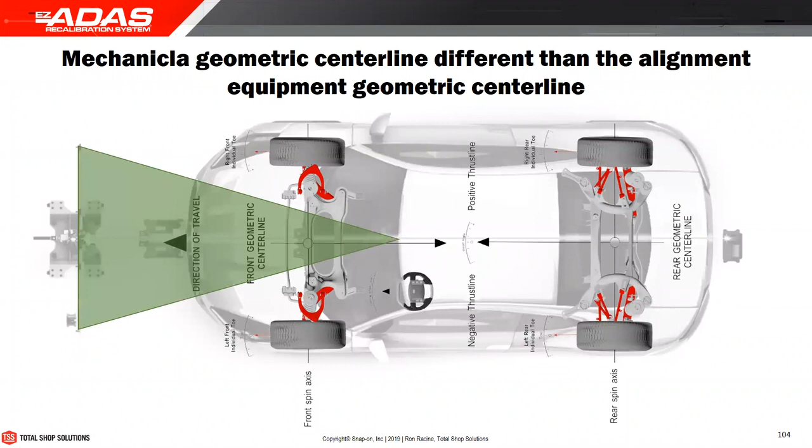All right, so I'm running over here, so let me, I'm gonna have to go to the end. Jason, are you still on? You bet I am. So how much more time do I have here? You're good, you're good, my friend. Just, people have been interested in this stuff, so have at it. Okay.

So quick, just a quick piece of information. Always use a scan. When you bring a vehicle in the shop, never perform any operation on the vehicle until you pre-scan that vehicle. So connect the scan tool, do a pre-scan. If you have a Snap-on scan tool, you can go, it gets a code scan, pre-scan. It's going to go in there and interrogate every host controller on that vehicle. So if it's a BMW, you may have 92 controllers. If it's a Ford F-150, you may have 25 controllers. It all depends on the options, your ADAS options.

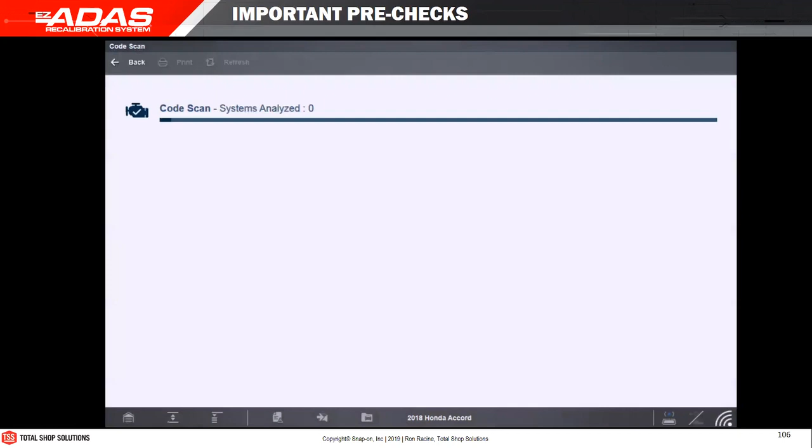So it's going to go in there and pull all that data and let you know that you have codes. And the reason why you have to do this is if you do a calibration and you did not perform that, and there is a code in there and you don't know, you may find out too late, you find out after the fact. So when you find this code after the fact, you don't know if the code was there before you started or if the code occurred after you did the procedure. So you got to start with a clean slate. This has been standard operating procedure for Volkswagen products since 2003, if I recall correctly.

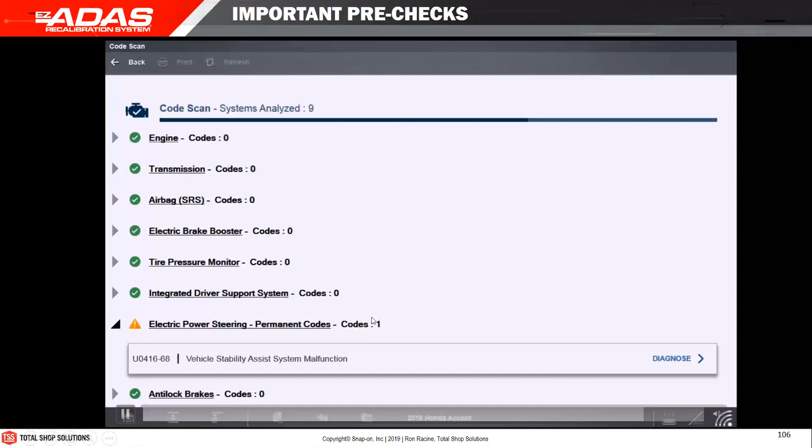All right, so this one here has a vehicle stability assist system malfunction. So we have to go and fix that.

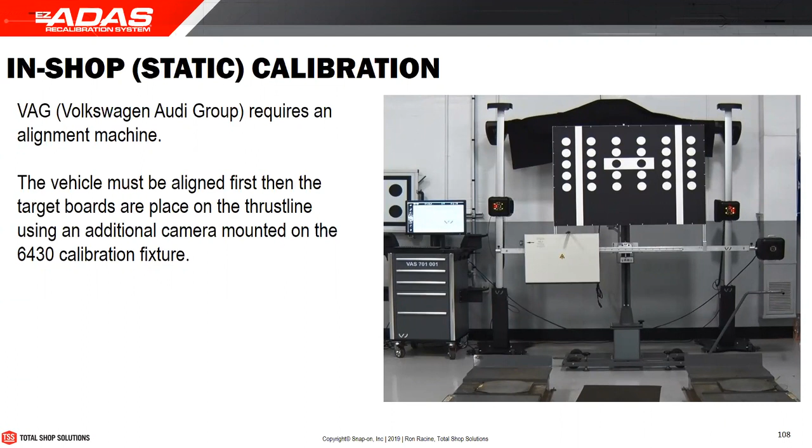We talked about the Ford, we saw that, I like those targets. So how will this affect the wheel alignment business? It does affect the dynamics a little bit. So instead of calling it wheel alignment, now it's more vehicle dynamics. Your traction control, your anti-lock brakes, your electronic stability control, lane departure, cruise control, all alter the behavior of that vehicle.

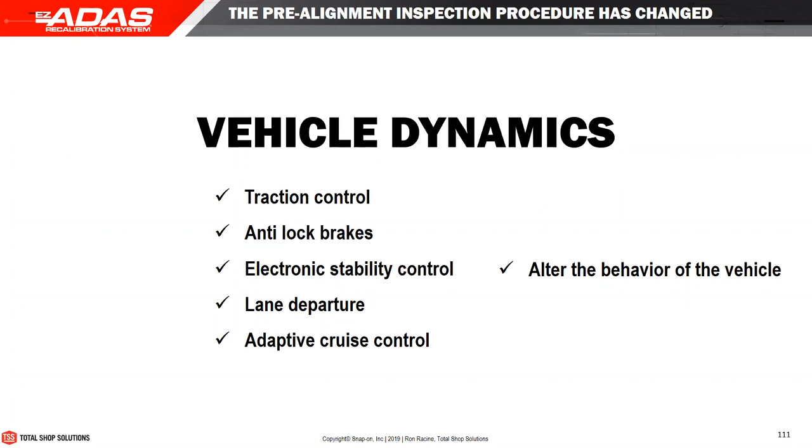And in some cases they may alter the behavior, but the customer will come in and say my car is pulling, and actually the car has been aligned incorrectly. The steering angle sensor and torque sensors have different values, and the car is actually being steered by the power steering, realigning the sensors. So in the old days you'd bring a vehicle in and you would lock that steering wheel with a steering wheel holder that didn't move. You can't do that today because of the sensors on the steering column.

That's probably a different alignment deal. Pull and drift compensation: vehicles equipped with electromechanical power steering, the majority of them will have some strategy built into the host controller that will enable that vehicle to compensate for pulls, drifts, road crowns, and crosswinds. This is to improve the vehicle owner's experience, so he doesn't get that pull.

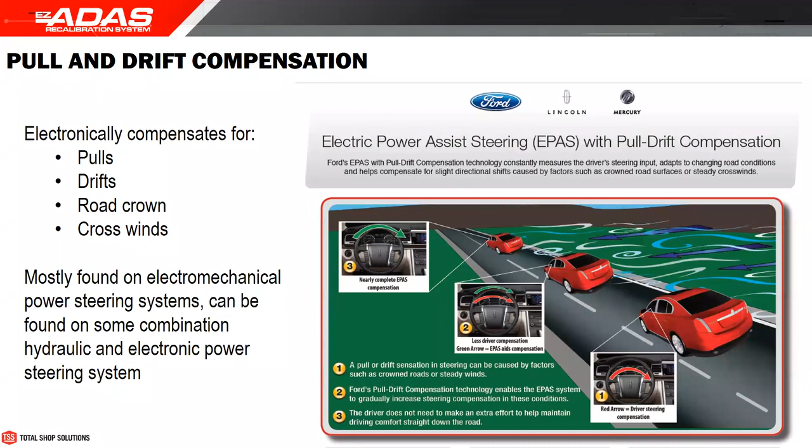So if your alignment business is less than it was, you may want to start connecting to those vehicles and investigating these computers, because you'll find this information here: pull compensation enable or disable, short-term pull compensation.

So it's like the fuel trim for fuel injectors. If you're driving a Ford F-150 and the pull compensation is enabled, the system is masking a pull on that vehicle. You would never feel it, but the report is given to you. The feedback comes through the scan tool.

So doing a road test, connect the scan tool, do a pre-scan. On a pre-scan, you may have codes that will say short-term pull compensation, 10 pounds. That's an indication that there's something wrong with that vehicle and the customer doesn't know about it, doesn't feel it.

So then you go drive the vehicle, and if it says pull compensation enabled, you have confirmation that there is a problem. The next step is to disable the power steering. If you want to prove it to the customer, you can fuse it out and drive the vehicle with no power steering, and it'll start pulling because now there's no compensation. Torque steer compensation, same thing.

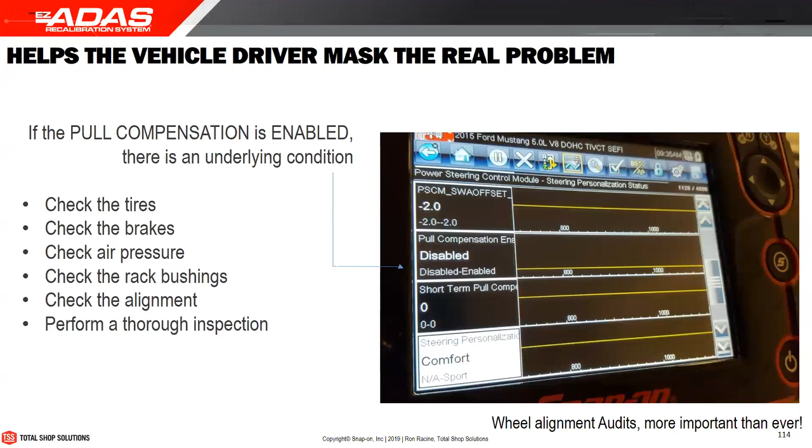Those electric power steering vehicles are much smarter than a hydraulic power steering vehicle. So in this case, you would have to check the tires, the brakes, the air pressure, the rack bushings, the alignment, perform a thorough inspection. And you may even have a code, DTC 1023, which means the compensation system cannot compensate anymore because the pull is too severe.

When you look at the data inside the computer, you'll find things like pull compensation value, final pull compensation value, pull compensation enabled status. So when the vehicle's not running, not moving, the status will be disabled. Your steering wheel angle, long-term pull compensation, short-term pull compensation - those are pieces of information we need to know before we start working on that vehicle.

There lies the reason why it's so critical to scan the computers. You do a complete scan, then you go into the EPS, or electromechanical power steering computer, and you interrogate that computer and pull that data out.

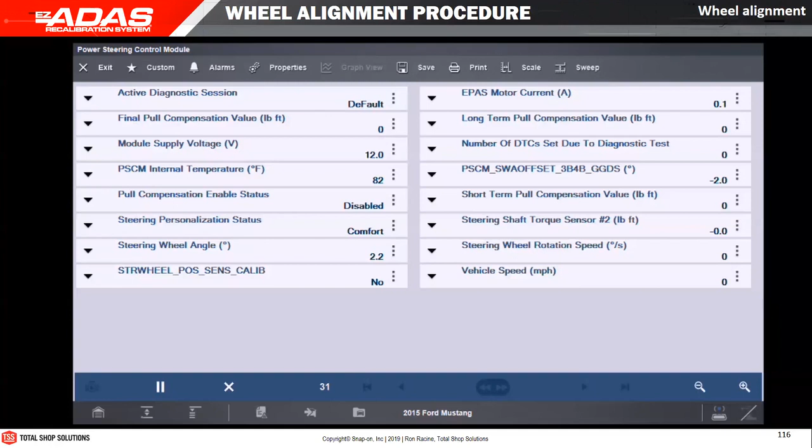Because if you ask the customer, they may say, oh, nothing wrong with the vehicle. You also have to remove the non-essential loads from the vehicle, check and adjust the fuel level - my experience, it's critical. Windshield washer fluids, you want to make sure the antifreeze is okay, the engine and transmission fluids, all the fluids are okay. Ensure the spare tire and tools are in the proper location, because all of those will change the ride height a little bit.

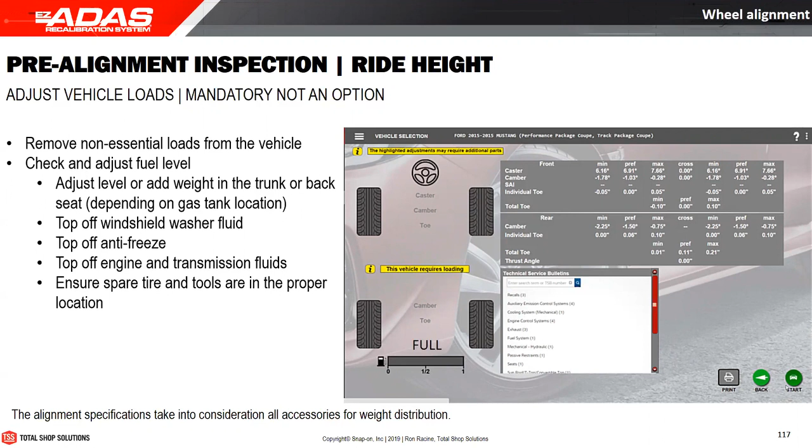And if you start stacking all of these together, you may get a big ride height change. The ride height is critical because the camera height is based on the ride height of that vehicle. In the past, when we did alignment inspection, sometimes we'd measure ride height, and if it wasn't right, we just continued on anyway - it wasn't critical. But today it's a little bit more critical because of all these other components that depend on that position of the vehicle. The vehicle's been homologated like that - when they release it from the factory, the manufacturer knows everything about that vehicle, how everything should be set, and that's how it should remain.

And finally, some alignment machines like the John Bean and Hofmann alignment machines will actually measure the tire diameter. This is critical because the wheel speed sensors send information to several host controllers, or it's shared by several host controllers. So if you have different tire diameters, you will have different wheel speeds.

For example, worst case scenario: Subaru WRX, fully engaged all-wheel drive vehicle. If the customer is driving that car and it's got like 36,000 miles, and he has a catastrophic failure on one tire, blows it and only replaces one, he's going to be repairing the transfer clutch between the front and rear within the next 90 days. So on those types of vehicles, you just can't change one tire. You have to change two.

At least the minimum is two on the same axle. The manufacturer recommends all four, because now if they have different diameters, different speed information - and these are always engaged, like road magnets - that clutch will slip and it overheats and destroys the clutch. We've heard from one of our clients that normally when that happens, it's about a $3,800 repair minimum.

So this is some information you get from the alignment machine. There's other information you can get also, like the wheelbase, the track width, the cross dimension, the offset of the axles. So if you're blueprinting a vehicle, not a bad idea to do that. It only takes about a minute to get that data.

There we go - Easy ADAS. I'm not sure about the iPhone, I don't think there's one at the Play Store or the App Store. It's just Easy ADAS. So when you download the app, it's going to ask you for a registration number, and you'll have information on how to get that.